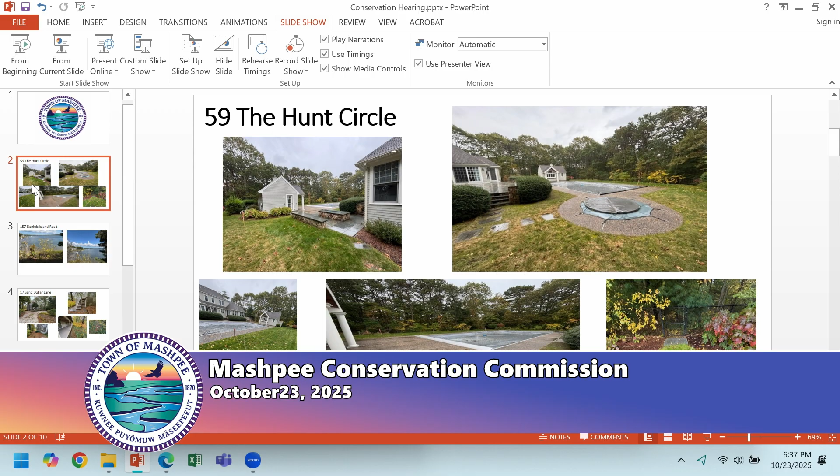It's a small, what do you? I would assume a small little mini, I'm not going to call it an excavator, kind of a dingo, Bobcat. Backhoe, Bobcat track machine. And the limit of work line on that? So the limit of work line, it's that red line that follows the edge of clearing that's currently there now. If you start at the northeast corner, it comes down around and then wraps back up to the northwest corner.

And we've got all siltation barriers and there's detail shown on the plan. Because you're right on the edge of where it drops off. Correct. There is no excavation there, but things wash, but we did propose one. Okay, I'm all set, Mr. Chairman. Okay, thanks. Shauna? I don't have any questions. Okay. Sandy? No, no questions. Okay, Rich? No question. No, same here.

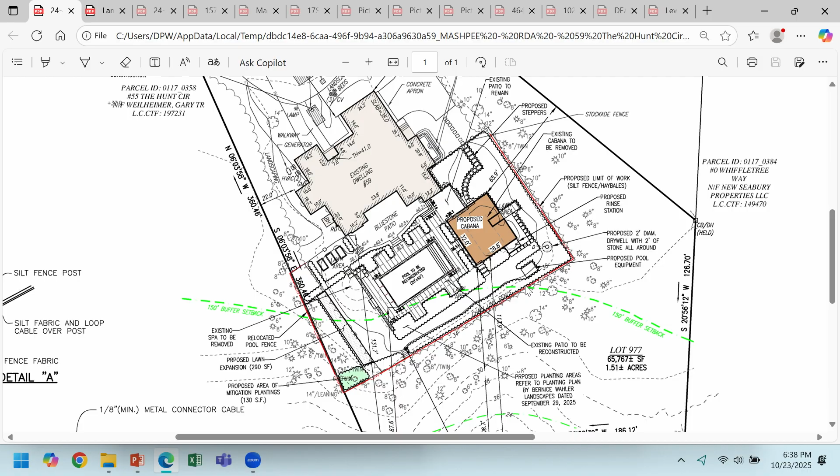Any comments, Dan? No, for this project, I went out to all the sites this week when it was raining. It was fantastic. But I did that because I wanted to make sure of runoff and things. So they did have a hose going into the buffer zone. You can see it actually right here, going off the bank. So that will be a boilerplate condition if this project does get approved. And if you could please also inform the homeowners of that. Not a problem. That just can't happen, that's all. That's it for me. Okay, thank you.

Okay. All right, any more questions? Do we have a motion for 59 Hunt Circle? Steve? Oh, thank you. Okay, any comment from the public? Okay, thanks, Paul. Okay, so do we have a motion for 59 Hunt Circle? Make a motion for negative determination at 59 Hunt Circle, and do you want to condition the hose coming out, or is that something that? That's boilerplate, already in the order. Okay. That's it. Okay, the motion made, do we have a second? Second. Okay, motion made, seconded. Any other discussion? Okay, seeing none, do a roll call vote.

Sarah? Yes. Paul? Yes. Shauna? Yes. Sandy? Yes. Rich? Yes. And I vote yes. Okay. Thank you for your time. Have a great night.

Okay, next item, notice of intent filing, 157 Daniels Island Road. Frank and Christina Varinos, proposed stair, fixed pier, ramp, and floats for Daniels Island Road. Representatives Down Cape Engineering, DEP number 43-3348, and it is continued from 6/26, 7/24, 8/21, and 9/18.

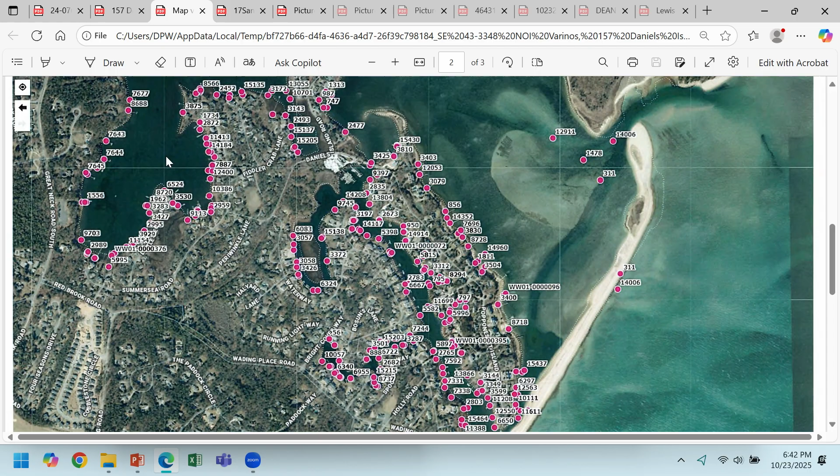The cumulative effect was brought up a lot, and we've tried to address everything in that DMF letter. I think we have such a large site relative to the Popponesset Bay area. We've got almost 200 feet to one pier and over 100 feet to the other. So as far as the impact from this site, we feel like it's in line with the rest of the area. So with that, I'll turn it back over.

Thank you, Danny. And I should note that the clients are also attending the public hearing this evening. I just want to briefly address two concerns, which I spoke to more thoroughly in my letter. The first is that the clients feel as if they're being treated differently than their neighbors who have had similar piers and floats approved by this commission.

In my October 16th letter, I provided you with numerous examples of those projects, including piers and floats approved under the current regulations. Certainly some of these structures predated your most recent regulations, but a number of them have been approved since the adoption of the regulations. And I also provided case law reminding the Conservation Commission that it must apply its regulations in a uniform fashion.

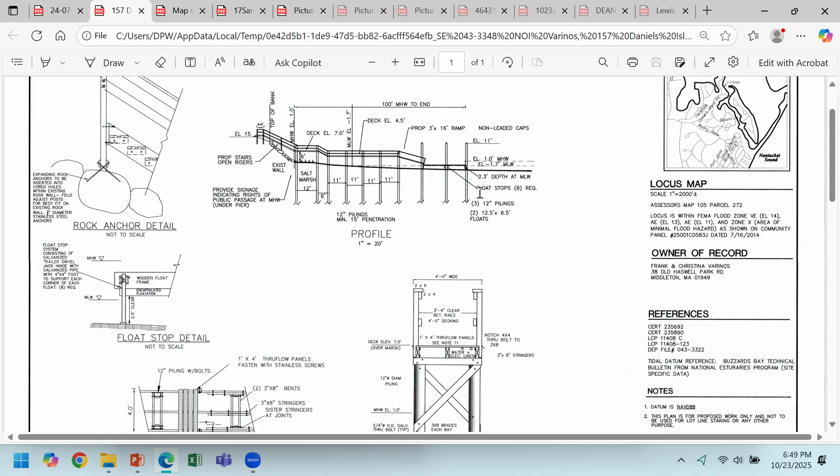Part of it was we didn't know what size that boat was going to be. Has that been sorted out? Yeah, through the chair, it would be a modest sized vessel. It really only draws about a 6-inch draft, and you've got a short draw prop hanging down from that. So you've got a full foot underneath that prop, and it's a light boat. So you're not talking about a heavy ship that needs a lot of energy to move.

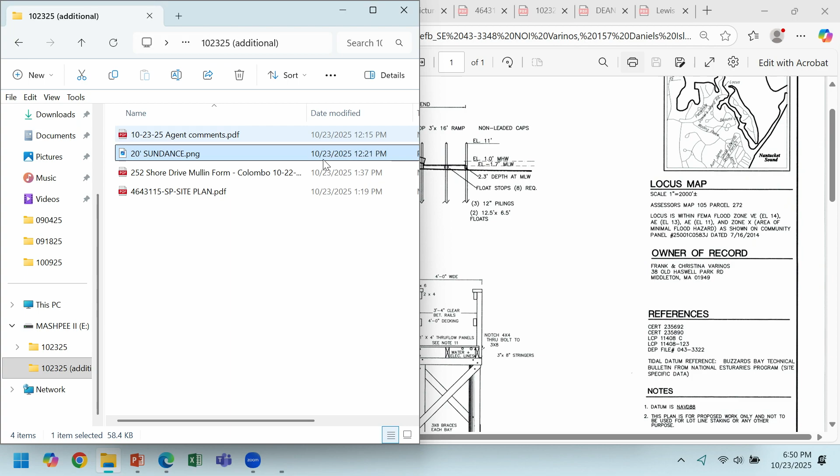And so we feel we're treading very lightly on the environment. Dr. Varinos is happy enough with that, and would stipulate or be happy to have that be a condition that we use his vessel of the smaller size. Okay. All right, Sandy? No. Okay, Rich? No, I think they've addressed all the concerns, and I know the last meeting we had was the boat size. They've come back with that, so I think they've done a good job with that.

Okay. Yeah, I agree with that. I think all the concerns have been met, I believe, right, Dan? From the list that we had from last time? Yeah, and if they're offering to bring it up 8 feet, as Mr. Rojala said, then I think that is absolute. So also keep in mind there is a shellfish mitigation fee. I know that was discussed a couple hearings ago, but is that still acceptable?

It's a healthy fee, and even though we've reduced the float size a little bit since that was calculated, we're happy to continue with that. And I think you could look at that as like an investment. It's like retirement. You provide a lump sum and live off the interest. I think that putting that many breeding shellfish out there will offset the long-term effects as well as the short-term. Very good. So that's all for me.

All right, any comments from the audience? Okay, seeing none. Do we have a motion for the notice of intent filing for 157 Daniels Island Road? Make a motion to close and issue at 157 Daniels Island Road with the following conditions: to raise it 8 feet over the salt marsh. Obviously, we talked about the float stops, the flow-through decking, condition the boat size, and the shellfish mitigation fee.

I think that covers all the conditions that we talked about, right? I was going through my list, seeing if there's anything I missed. Mr. Chairman, there's also a time of year restriction in the DMF letter. Okay, thank you, Drew. Adding that into the motion. Okay, you want to add that in, Rich? Yeah, add the DMF letter and the time of year when the construction can take place. Okay, great, thank you. Do we have a second?

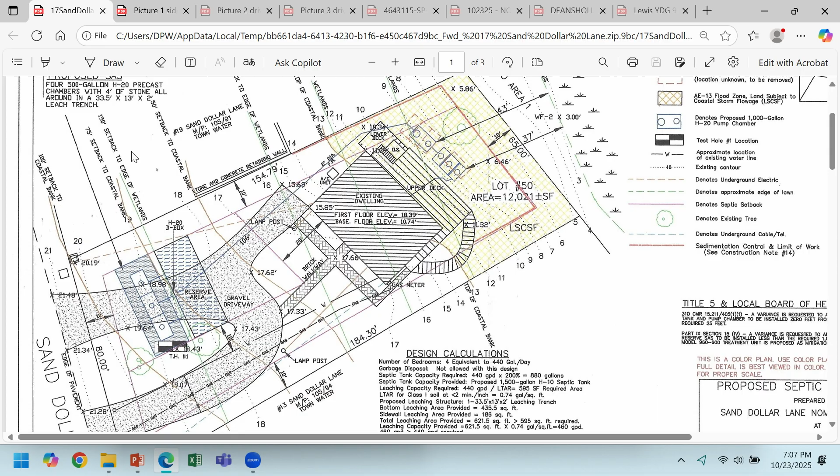Yeah, because do you have a layout of the house at all? I do. So, if we can be more creative to avoid all that excavation, yeah. I know we're losing 2 trees up at the SAS, which mitigation can take care of, but there's a large tree in the rear and all that vegetation within 40 feet of the edge of the wetland. Yeah. That's a good call, Steve.

Mr. Chairman, is it the bottom left picture we're looking at, that the pipe would come out of the wall? Yeah, on that side. Okay, so the bathroom is in the front corner, the pipe comes out back here, this is the deck, so the pipe comes out here, the bathroom is in the front. Oh, okay, well, that's even better. And this bathroom's in the front too, right? So all 3 bathrooms are in that front corner. Yeah. Okay, well, I can investigate that. I was told that it was not gonna be feasible, so.

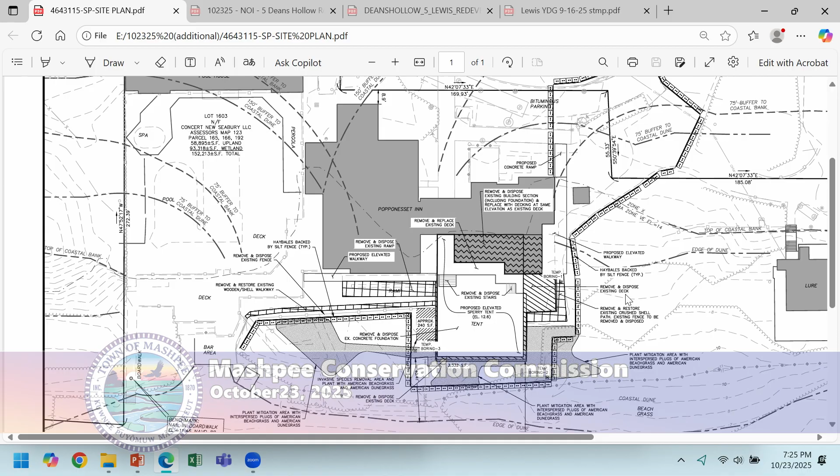We also confirmed that there will be no lattice, skirting, or breakaway panels around any of the elevated structure. The tent will now just have grass planted right up against the elevated structure, which should provide some protection around the edge and expand the dune restoration. So moving on to things that weren't necessarily requested but were part of this revised application. We have the removal of a narrow wooden walkway and crushed shell walkway that's to the southeast. That was originally intended as it's at grade, along with the existing tent. But since the proposed tent will not be at grade, there's no need for it.

So those structures will be removed and replaced with clean sand fill as needed. In addition, the wooden fencing around the tent and the walkway areas, those are no longer needed and will also get in the way of construction. So those will be removed and will not be replaced. The next matter is a recent change. I apologize for the last minute submission, but it turns out the applicant does not need the wooden stairway connecting to the elevated walkway to the northeast of the tent.

It was proposed as a potential connection to the existing shell pathway that leads off the site, but they no longer need it, so that's a reduction in 53 square feet of impacts to that inner buffer zone to coastal bank and coastal dune. So that latest plan today reflects that change, as well as a change in the sediment and erosion controls, which were now tighter to the walkway.

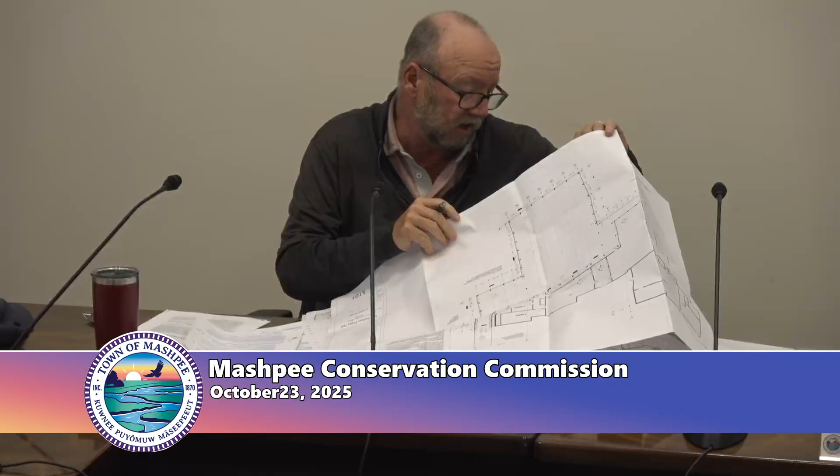Okay, Hannah, one of the questions that I had last time was a piling plan, number of pilings and so forth, and a building plan. So I just see there's a floor plan here, but there's no number of pilings. And then looking at the cross-section, I'm not seeing pilings, I'm seeing a post with concrete footings on, like, stair details. So, you know, what is the correct information for this?

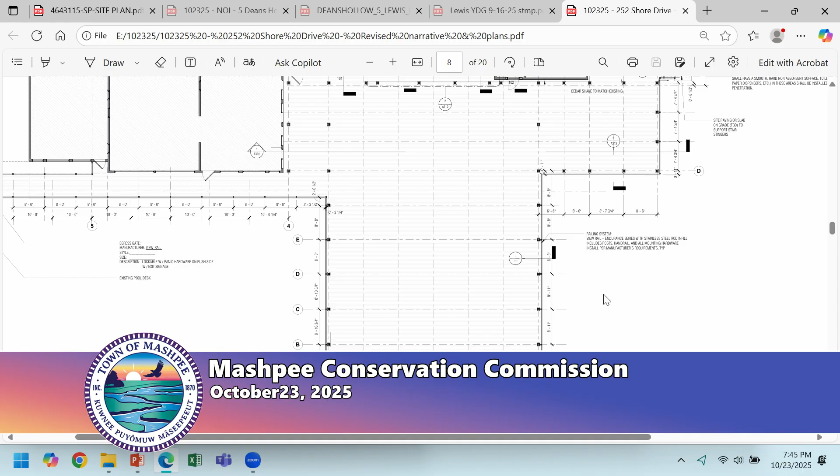They're shown on sheet A101, which is labeled floor plan. But if you look around the inside perimeter, you'll see the location of all the borings, or excuse me, of all the supports. Okay, so I see little boxes on the outside, but where you have center lines crossing each other, is that where the piling's gonna be? They're on the inside. The outside is just labels, letters representing the columns and numbers on the bottom. But on the inside, you can see the column structures.

All the plan shows are just lines crisscrossing, and so at each line that crosses, is that where a post is gonna be? No, no, if you can zoom in on the tent or any portion of it, you see the dashed lines, which as you mentioned, those are just the rows and columns. But at the end of those, you'll see right there. So there's nothing in the middle. If you look all around the inside of the structures, they're shown. Okay, so you're just gonna have perimeter 6x6 wood posts on concrete piers? Correct, as shown on the plan.

So these are all like steel beams going across from post to post? No. So how is this floor system being supported? And then there's nothing on the walkway heading off towards the south, or the walkway on the northeast corner either? They're all shown on the plan. I don't know how else to describe it to you. There's 3 sheets that were included as part of the structural design that we submitted.

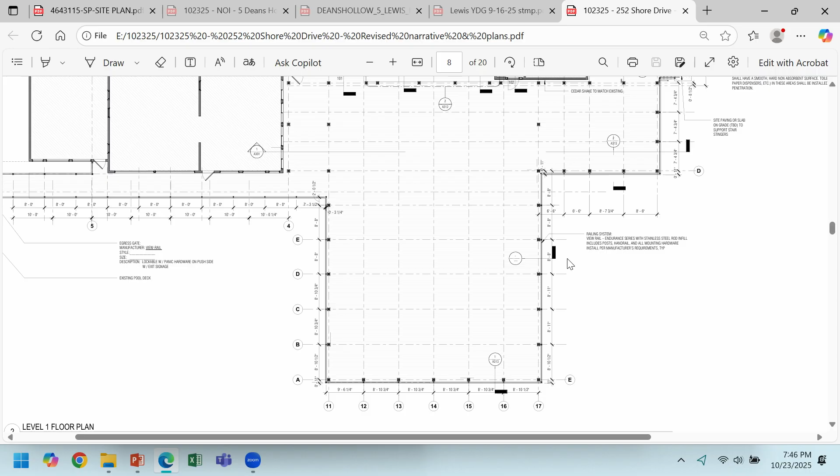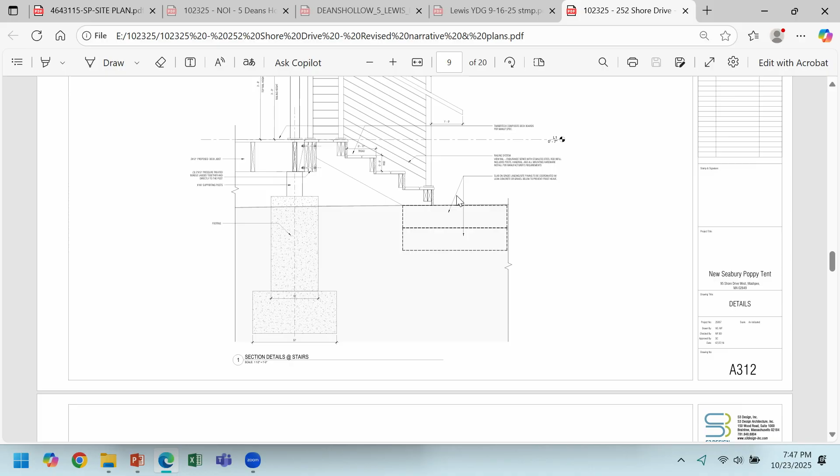Right, so you have this plan that really doesn't show all the pilings, and you have a couple of cross-sections with, at the end, stair details, so it's not what we requested. That's a typical detail on the plan A101. It shows the location of every one of those. Do you see that now? Okay, so it's just showing posts on the perimeter, right? Correct. There's a couple in the interior, but yes, that's them. That's the plan that you asked for.

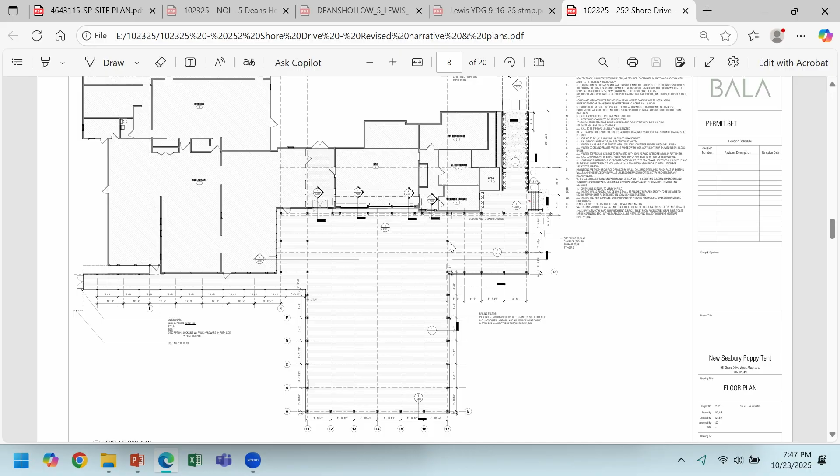If I may, Megan. Sorry. Okay, go ahead, Megan. Yes, Megan Brady. I'm with S3 Design, we're the architecture design firm. I'm the senior product designer. So although we aren't showing the actual footings themselves on this architectural plan, as you had mentioned, at each cross-section location, there would be a post and a footing supporting the structure below the deck.

The posts that you're seeing on the floor plan represent the tent structure that is sitting on top of the deck itself. And there was a corresponding post and footer below each of those as well. Okay, so how come you didn't provide the plan that we requested for number of pylons? We're happy to provide that. I apologize for that not being included in the submission. Yeah, because this commission doesn't know how many pylons you're putting into this dune.

And then the other concern I raised last time was, this is a velocity zone elevation 14, and the grades are at elevation 8 and 9. So how are you going to prevent, when you have wave action in there, these posts from getting washed away from scour and wave action? I don't even know if your plan meets building code compliance for velocity zone. I don't even know if it meets our requirements for a velocity zone. It does. It's an 18-inch concrete.

Well, there's no dimensions on this here. This says, on the stairs, footers. They're the same as the stairs, correct? Yeah, this cross-section just shows a footing. There's no depth to it. There's no correlation to flood zone. It says a 6x6 supporting post with, looks like a wood girder, on an 18-inch diameter concrete footing. Right.

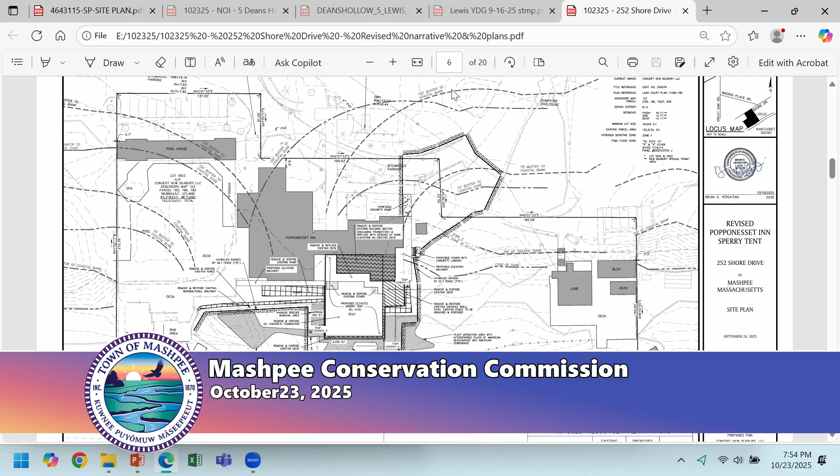I think what the applicant had mentioned last time is that this is a lateral addition, and it can stay at the same level as the building, if I'm correct. And it's not physically connected to the building. Right. If this deck were to be physically connected to the building, it would have to be FEMA compliant.

So, that was the reasoning, to keep it at the same level at 12.6. Yeah, so in the end, we'd have a tent with a floor elevation of 12.6, which matches the first floor elevation of the building, in a velocity zone of 14. Right. It could have lots of people in it with an upcoming storm.

Well, I'm missing something here. Well, hopefully nobody's there when the storm comes in. Yeah, right. Maybe it should go up. Unhappy brides.

Okay. I'm just concerned that with wood piers on a concrete footing, I concur with everything you're saying, that you get scour, you get wave action coming in there, and those posts get taken out. It's a lot of erosion, you know, versus potentially having a piling or even a helical pier that you drive down.

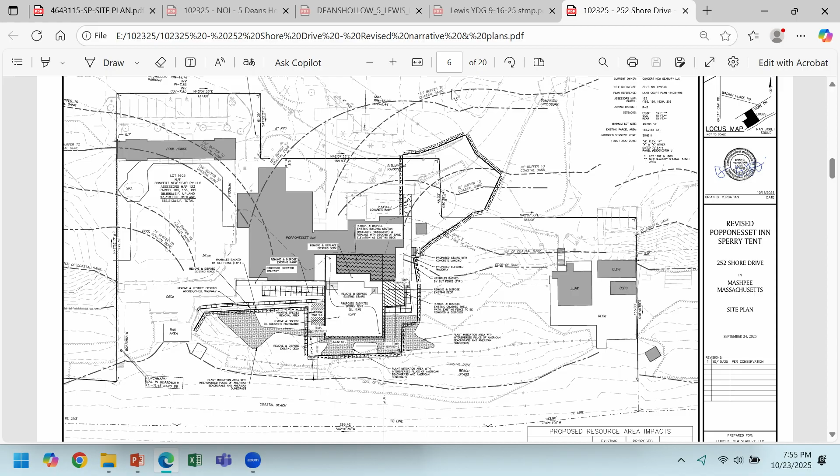We've addressed the 8 feet down scouring issue or something like that in coastal A. This is velocity. You're in there, ground zero. Right, yeah, so, and say, can we lessen the amount of piers? Can you go with, instead of wood framing, steel framing, to lessen the number of holes dug in that dune? So those are just a couple thoughts I had on it, but, okay.

Dan, Drew? Any comments from you guys? No comments from me. No, I don't have any comments for this one. Okay. I'm not ready to vote on this, because I don't have enough information to make an informed decision. Yeah, it sounds like the commission really wants to hear how many piles or installations overall can be going into the dune. So I didn't know if you wanted to proceed tonight or come back.

If the commission is not ready to vote, then we will request a continuance to the next hearing. All right, so that would be November 13th. But you need to be able to do these boreholes to come back with a definitive methodology on how you're going to put the footings in. So do we need to do anything to give them the okay to go ahead and do the boreholes? No? Okay. I'd like to see if there's an alternative to reduce the disturbance on those boreholes.

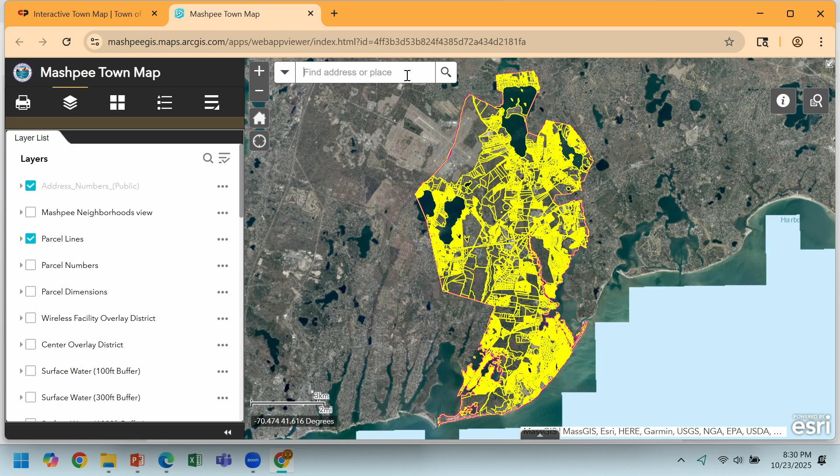Okay. Leather Leaf Lane? No, it's off Old Barnstable. Right, yeah. So this is the location here. Yeah, so for Paul's comment, this is the offset land, and the wetlands nearby would be the Childs. I don't know the buffers from there. But there is one there, and that's the only one I know of. The Childs River ditch here could be the other option, but that is currently dry. That has no water in it, so. Right.

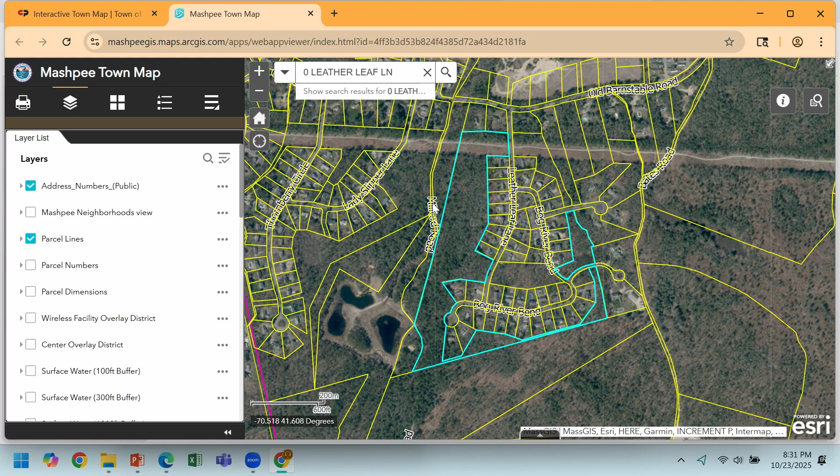Okay. All right, so at this point, let's say we can make a motion to close and issue with conditions to have all Board of Health approvals and the aggregate land submitted in the record, and then that can be dispensed pretty quickly once the applicant provides it. We'll get that to you tomorrow if you want. Yeah, if everybody's happy with that, we can proceed. It needs to be a matter of record and not on somebody's phone. Right. Trust but verify.

So we have a motion for 5 Dean's Hollow Road for a proposed IA septic system. Give it a whirl here. I make a motion to close and issue at 5 Dean's Hollow Road with the following conditions: the nitrogen aggregate program, where the land is located, and the approval of the Board of Health. Yeah, you probably want to have all Board of Health approvals and variances, so it's one complete package.

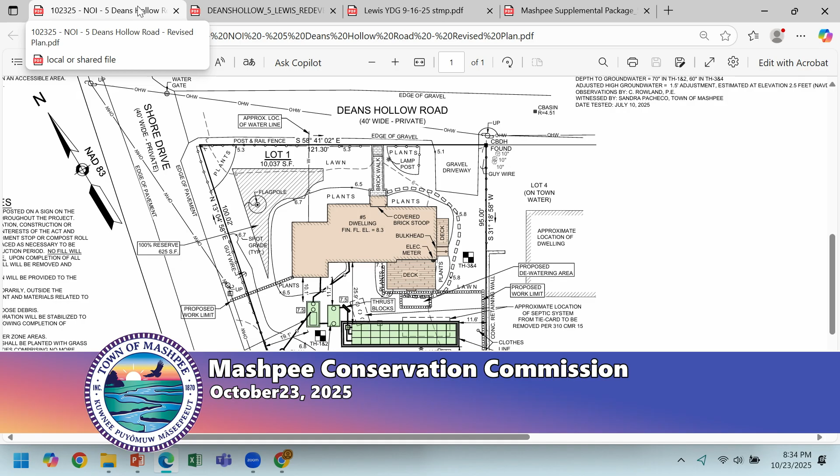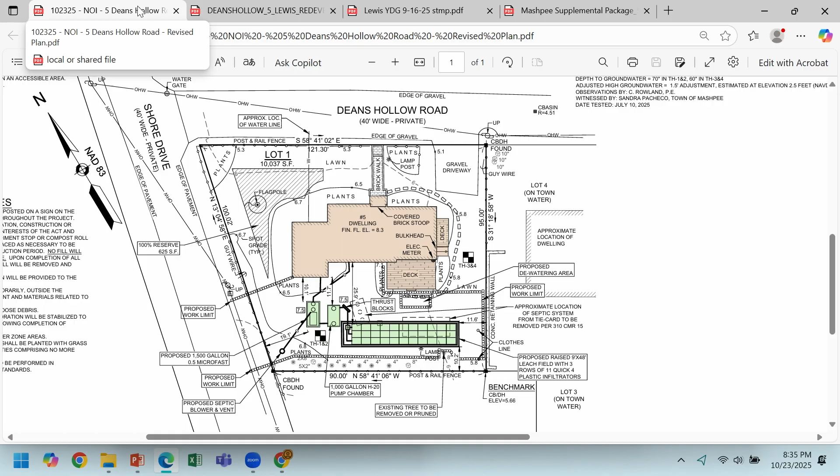The applicant requests permission to raise and rebuild with the new house at elevation 14.1, which meets the current flood code requirements. The new dwelling will include a front porch, back deck, rinse station, as well as the proposed raised septic system in the backyard. The project includes the updated existing septic, which will increase the flow. The raised leach field with wall to support the raised grade. Proposed septic is designed for 4 bedrooms. Currently, the site is developed with 3 bedrooms, and the new system, as proposed, is a 4-bedroom system. The site does have approval with nitrogen aggregate, as stated before.

So to go into construction protocol, we will be putting in a silt fence work limit. The existing septic tank will be removed as per Title V with a new raised wall around the proposed septic. We'll be installing the MicroFAST system, as well as the leach field in the raised area. This project has a much larger area to be cleared, and we can go into that in a minute to talk about the landscape plan. As part of this plan, we have proposed a series of dry wells and catch basins, which we feel meet the Conservation Commission's requirements for stormwater management.

Overall, this site is a benefit to the existing structure as it is a raised system. It meets the flood code requirements. We will be meeting coastal resilience requirements because of the new building code requirements, so it will be up on piles, designed for a much larger significant storm event. We've proposed pervious gravel driveways, as well as 1,291 square feet of mitigation on the west side of the property, and on the south and east side of the property, another 1,200 square feet of mitigation. So with that, I'll hand it off to Drew for the landscape design.

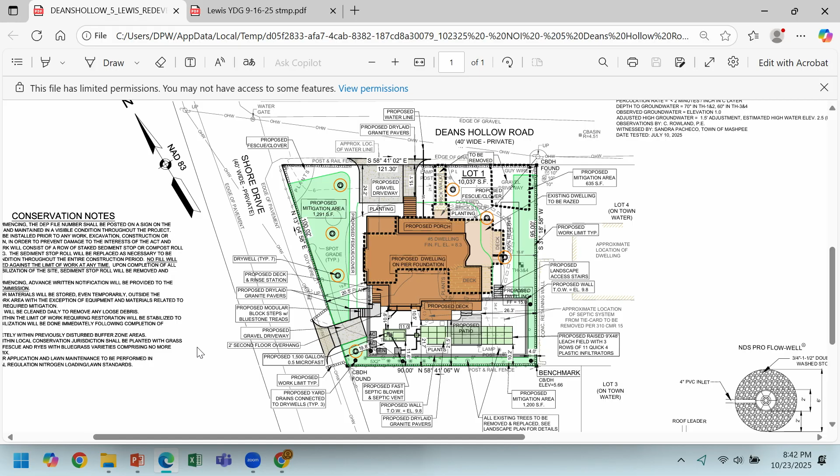Okay, great, thank you. All right, go to the commissioners. Sarah? Start with you. Good evening again, gentlemen.

A couple of questions. So, in the narrative that I have, I see a proposed, oh, excuse me, wrong paragraph, 2,377 square feet of installed native mitigation plantings, and I think, Andrew, what I heard you just say is that the number is actually 2,491. Yeah, we added mitigation. There's a lot of numbers to keep track of. So the narrative was not updated when we updated the plans, so the plans kind of hold.

So they've changed. I see that the narrative says that the lot will be cleared of all existing landscaped vegetation, and this is a small lot, but there's a significant amount of vegetation. If we're replacing existing vegetation, and maybe the staff or commission can educate me on this, does that count towards the compensatory plantings? Or are we expected to replace what we remove and then add additional compensatory plantings to meet the regulatory standards? Do you know what I mean?

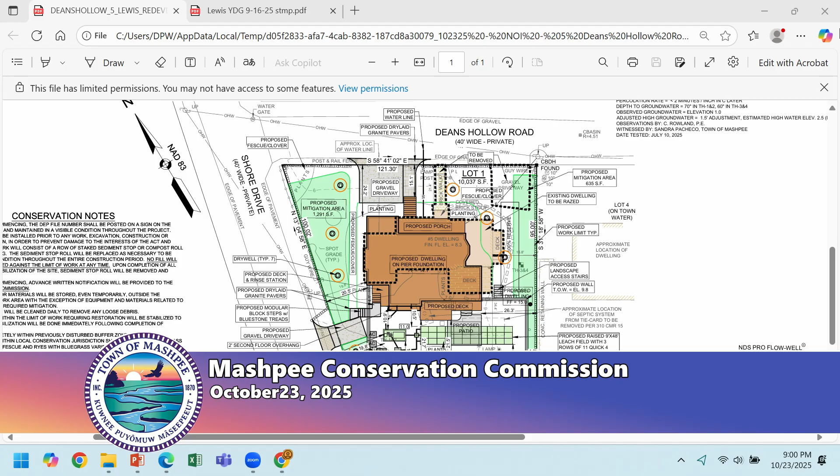An alternative would be to extend the wall coming from, I'll hold this up, sorry about putting this in front of your face, Adam. If we can extend this wall to meet the abutter's wall and extend this wall to meet the abutter's wall, we could eliminate that wall and fill right up against the abutter's wall. Okay, yeah, that'd be helpful. That would eliminate a potential issue. You have to fill 6 inches onto the abutter's property because his wall is 6 inches inside his property.

But if that makes everybody happy, including the abutter, then we'd be happy to do that. That was actually my original plan. That would eliminate a potential issue, so. What about the abutter? Yep, and the abutter's right here, so I'm gonna go out to the abutters. Oh, that's next? Okay, yeah. So, okay.

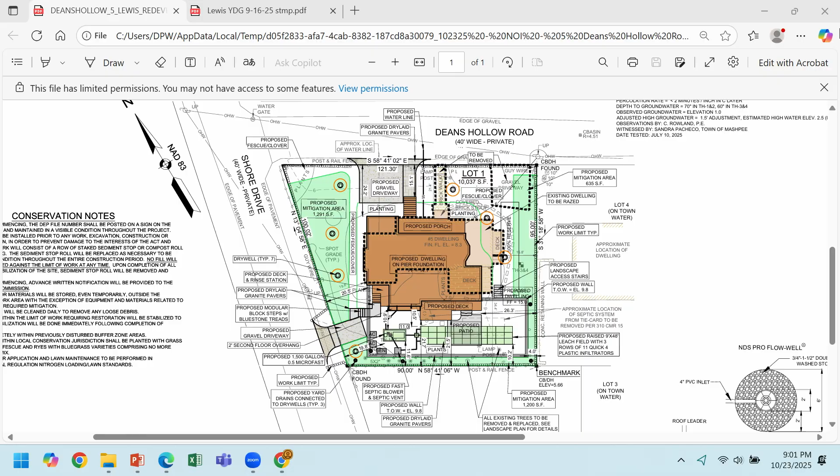Anything else from the commissioners at this point? No? Okay. Because the abutters provided a letter and requested it be read into public record, but we'll go to the abutters right now. Do you have any comments you want to talk about or respond to? I'd rather give you the record first, and I can elaborate and comment later, if that's permissible. Okay, all right. So I'm going to read this letter into the record.

This is from Paul and Katie Thurston, 9 Deans Hollow Road in Mashpee, addressed to the Conservation Commission. This is revised and resubmitted 10/20/25. Dear Chairman Cook, I'm writing regarding the NOI filing for 5 Deans Hollow Road, and as a direct abutter, we support the raise and replace application stating that the new septic system will help reduce nitrogen and get the existing system out of the groundwater. In addition, the new FAST system will have an immediate effect on both Deans Pond and the Popponesset Beach area.

However, we are looking for the following support and relief for the project, as we are concerned that some aspects of the project could damage our property and have adverse effect on a neighbor's property. The first item is the draft septic plan dated June 24th, 2025. In the draft septic plan, the following items are shown as specified. All the trees on the rear common property line have been shown as remaining, excluding one, attached and highlighted septic number 1. All the mature trees in the rear should remain, excluding one as shown. Septic plan dated June 24th, 2025.